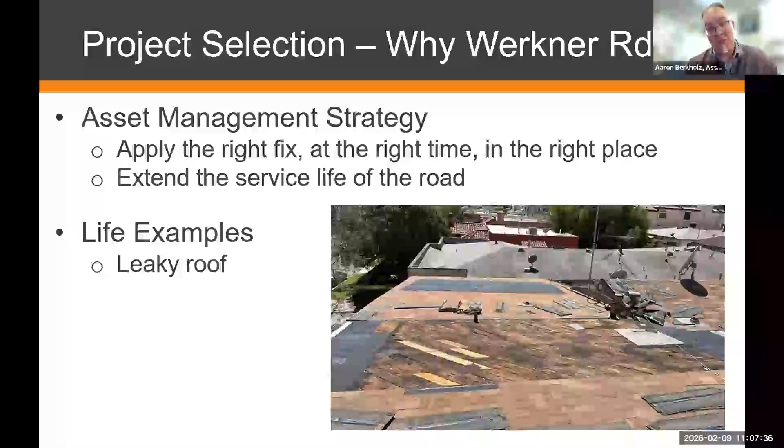Again, to state it simply, it costs more money to improve a deteriorated road than it does to continue to maintain an existing road that's in good or fair condition. Next slide, please.

And so, again, continuing to talk about asset management strategies that we employ here at the Road Commission, we look at the Pavement Surface Evaluation and Rating. That's called PASER. And so basically that is a visual surface rating that we apply to our paved county road system. So if a road is in good condition, that's a PASER rating of 8 to 10. And everything is based on a 1 to 10 scale. So 10 being the best, like a brand new road, and 1 being a completely deteriorated road. That would be in the poor category.

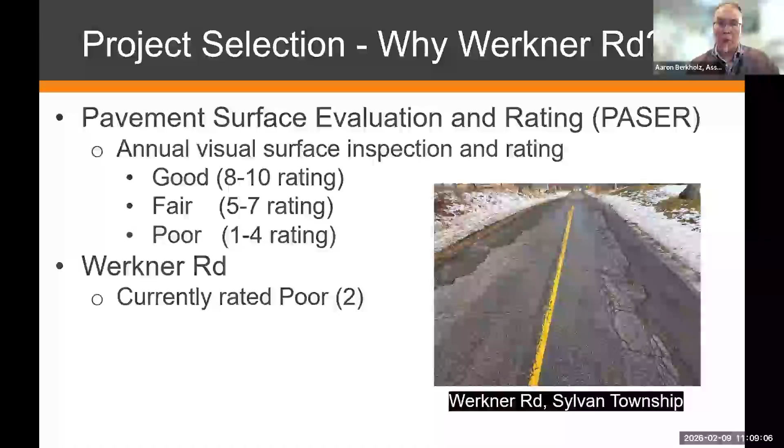So annually, we have those staff go out and evaluate every mile of our paved primary county road system. And then we go out every other year and we evaluate our local county road system, the paved portion. Next slide, please.

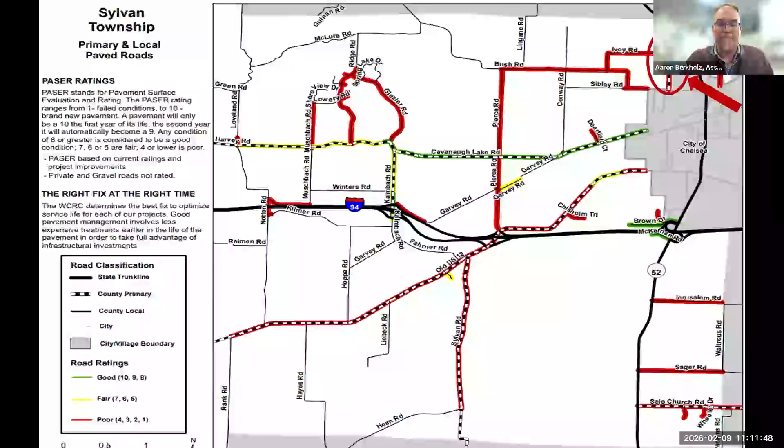So, again, going through how we selected Werkner Road, we get into a funding discussion. Werkner Road is funded in large part through the roads and non-motorized millage here in Washtenaw County. The current millage extends from calendar year 2025 through calendar year 2028. So again, that's a 4-year roads and non-motorized millage. That was passed with the support of the voters here in Washtenaw County, and we're very thankful for that.

Really, having that funding generated through the county road millage has allowed us to make significant headway as we've strived to improve primarily the county primary road network. It also is a non-motorized millage. So there is a portion of that millage that goes directly to Washtenaw County parks that is used for things such as the M52 trail or the border-to-border trail that extends along Huron River Drive. But again, that's right off the top of the funding that's generated by the millage. That goes to county parks.

And then the millage also provides funds to the Washtenaw County Road Commission, as well as the cities within Washtenaw County. They each get their fair share of that road millage. So for instance, City of Ann Arbor, City of Ypsilanti, and City of Chelsea do receive funds through the county road millage.

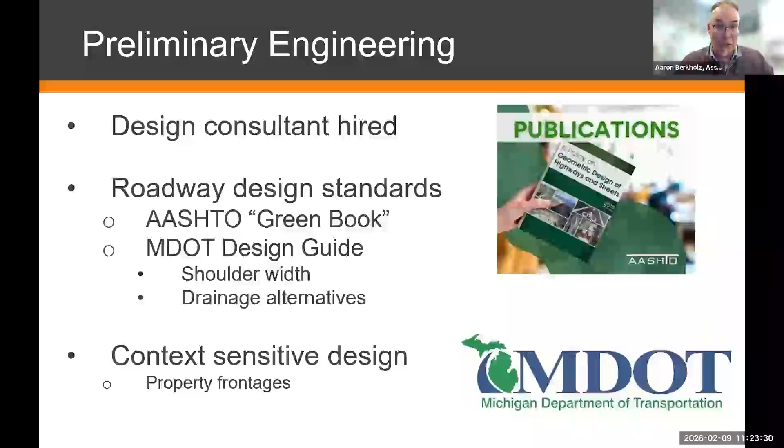Again, the homeowners, depending on the property, may actually own property to the center line of a county road. That does happen, where a property description will extend to the center of the road. But the Road Commission possesses that authority within that right-of-way to control the right-of-way and to thoughtfully improve it to promote the efficiency and the safety of the motoring and the non-motorized public. Next slide, please.

And a mill and resurface can be used for pavement that's in fair condition. So again, I talked about the PASER ratings, our asset management, and I talked about the leaky roof. In this case, this portion of Werkner Road, we just need to take the shingles off and put new shingles on. The road is in a fair condition where we can do a milling, a removal of the top 2 inches of asphalt, and then placement of 2 inches of new hot mix asphalt in its place.

The portion from the City of Chelsea water treatment plant drive going north up to M52, unfortunately, that is a leaky roof. That has gone too far. We cannot use a mill and resurface on that portion of the road. The road needs a more extensive improvement, and that's going to involve a pulverize and paving.

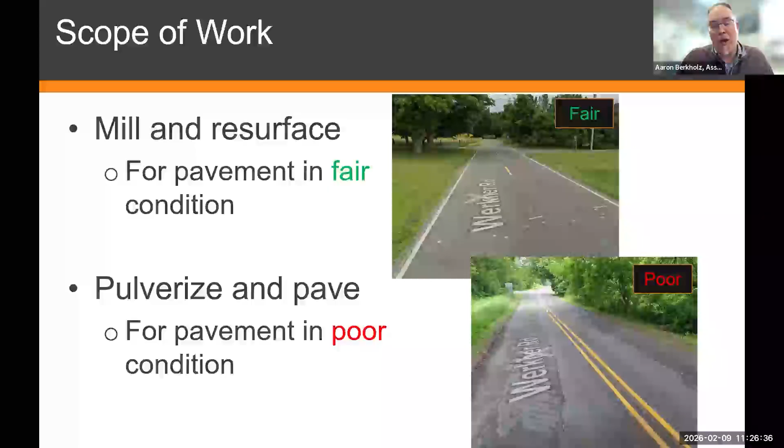So kind of repeating what I've talked about already in today's presentation, the portion that I'll refer to as Section 1, that's the southerly portion, extends from Sibley Road to 1,200 feet north. So again, that's approximately to the City of Chelsea Water Plant Drive. That is going to be milled and resurfaced. We would slightly widen the asphalt there.

And I'm going to stay away from widening the road because we're not going to widen the traveled lanes on the road. The existing lanes are approximately 11 feet on either side of the center line, and we would basically keep that. We're going to remark the lanes at 11 feet wide. We're going to add slightly to each outside edge with asphalt so that we can get a 6-inch white edge line along each side of this portion of the road.

In the past, we had previously used 4-inch white edge lines and 4-inch yellow center lines. But in the past few years, we have been transitioning into 6-inch wide lines for the edge line and for the yellow center line. And really, that provides improved safety for the motorist, particularly on a dark and stormy night. The motorist can more accurately see the edge of the road, see the center of the road, and also with current vehicles, with vehicles that rely on those markings for things like lane assist or lane departure, it helps to have that wider edge line and wider center line.

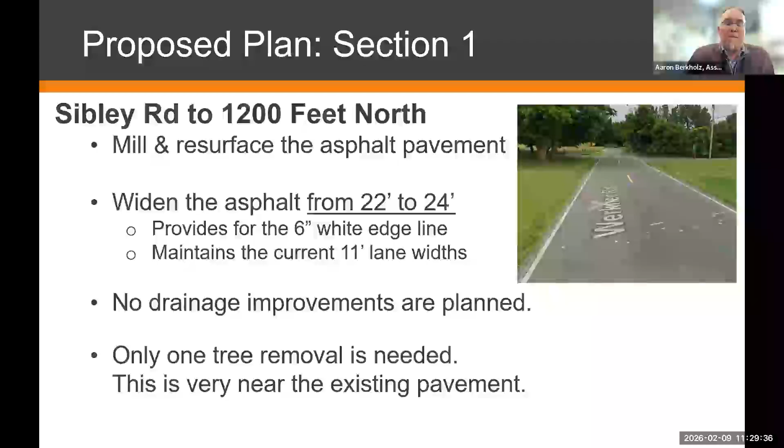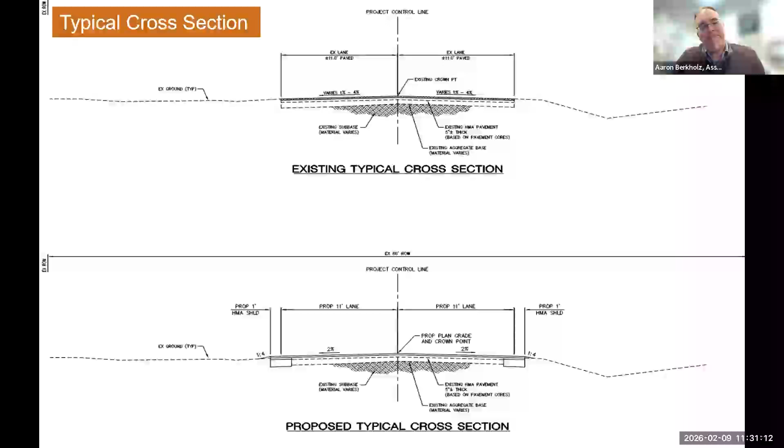So this is the proposed plan to the north. Again, I've talked about this previously in today's presentation. This is section 2. So this extends from approximately the City of Chelsea water plant, 3,700 feet north to M52. Again, this is the leaky roof portion of the road. We can't simply slap some shingles or do a mill and resurface on this section of road. It's too far gone. So what we would do here is we would pulverize, shape, and compact the existing road material.

Again, that involves bringing out a pulverizing machine that blends the existing asphalt material and the underlying aggregate, that stone base, and then that blended material is used as a base for the new asphalt surface that's going to be put on. Again, there's a mix of asphalt materials here. There's the old original asphalt, there's cold patch, there's asphalt wedging that's been done over the years. All that material is going to be blended together.

It's going to be shaped to provide a 2% crown. The 2% crown is the slope on the road. It extends from the center line to the outside edges to shed water to either side of the road. That rainfall, that storm water, it sheds it off of the road into the outside edges. It's really important to have that crown on that base material because then that translates into the 4 inches of new hot mix asphalt that's placed on top of that. Typically, a road will have a 2% crown, a 2% slope that extends from the center line to the outside edge of the road.

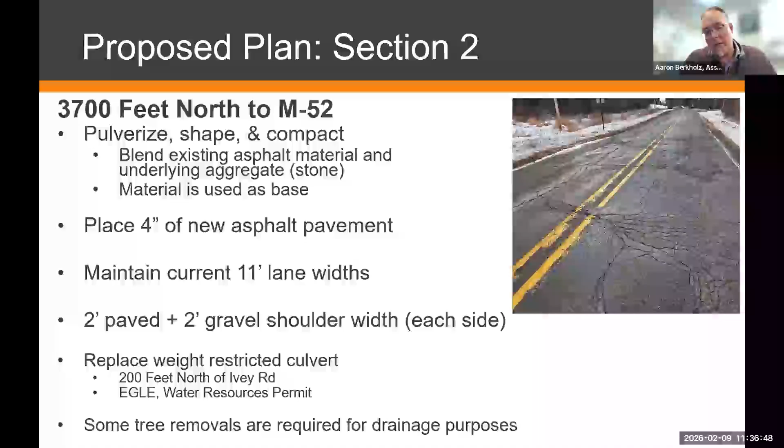You can't really use it on properties that fall away from the road, because you can imagine a curb and gutter, the back of a concrete curb and gutter is higher than the existing road. So if it's higher than the existing road, to have a property that falls away from the road, you actually would be impacting more of that frontage if you put a curb and gutter in.

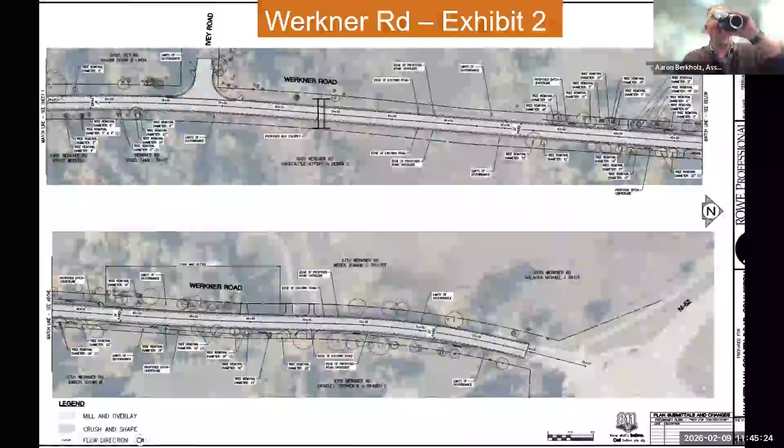So again, Exhibit 2, this is, I'll call it, the northern portion, that section 2 of the road improvement. Pretty much this shows the intersection at Werkner and Ivey extending north up to the roundabout at M52. So as you get into this portion, we do have tree removals called out on here. And you can see where we've got our plan call outs that indicate a tree to be removed, the size of tree that needs to be removed.

And again, the tree removals that have been called out here are necessary for us to make sure that we're dealing with the road runoff, with the drainage in an appropriate fashion. In all, we've proposed the removal of 48 trees for the entirety of this roughly 1 mile segment of road. Of that, there are no trees that are identified for removal that are larger than 30 inches. So basically, when the surveyors measure the trees, they measure it at chest height. And so we don't have any trees larger than 30 inches that we plan on removing.

We do have 2 30-inch diameter trees that we would propose for removal. We have 12 trees that are 21 inches to 29 inches in diameter. We have 10 trees that are 18 inches to 20 inches in diameter. We have 7 trees from 12 inches to 17 inches in diameter. And then we have 17 trees that are smaller than 12 inches in diameter.

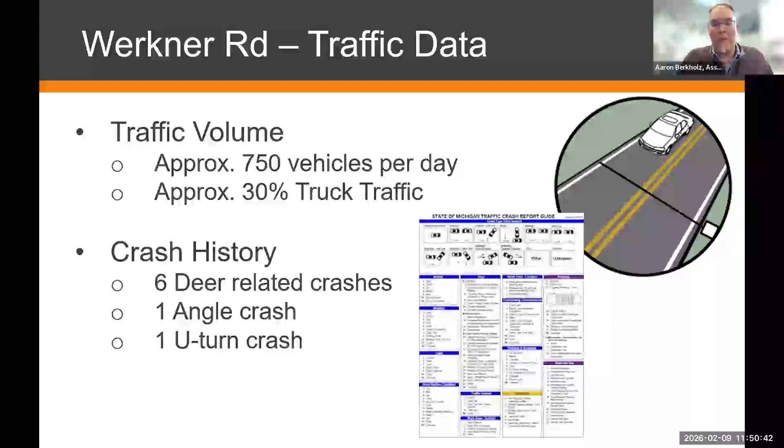The reason we look at life-altering crashes is often there are ways that we can incorporate improvements into the road to reduce the possibility of that type of crash occurring. And one thing we do have to look closely at when we're trying to make that type of improvement is having a clear zone along either side of the road. That is one of the factors that would improve the safety for the motoring public. Here, we look at the crashes that have occurred in the past, and we're thankful that that has not been the case here. Next slide, please.

Another topic that has been brought up, and certainly not unexpectedly, because it comes up quite a bit, is the speed limit. So again, Werkner Road is currently unposted at a prima facie speed of 55 miles per hour or whatever is prudent. Looking at the Michigan Vehicle Code, prima facie would mean on the face of it. And basically what that means is that for an unposted county road, the motorist can drive up to 55 miles per hour or whatever is prudent for road conditions. Again, you are not going to be very thoughtful as a motorist if you are driving 55 miles per hour on a snowy and icy day. But that really applies to any road, whether there's a speed limit posted or unposted.

It's up to the driver to employ, I'll say, some common sense, which isn't always so common, to actually operate their vehicle in a safe and prudent manner. Speed limits are data driven. So basically the way speed limits are established is they're measured in the field. Prevailing motorist speeds are used to set the speed limit on a road.

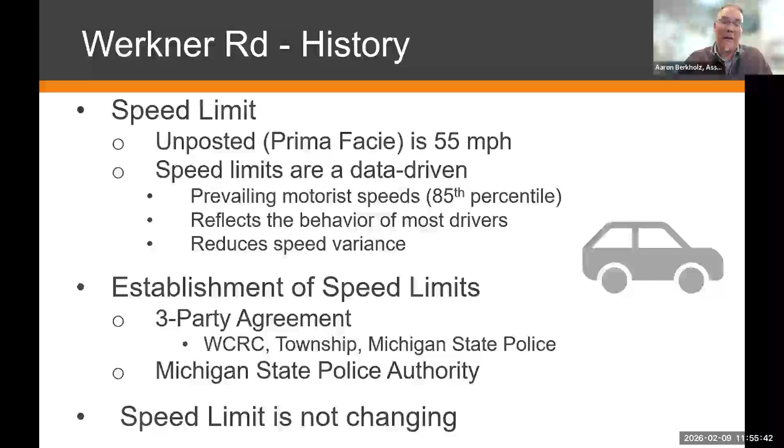So the next steps involved in this project, we will have a discussion with an individual property owner with any property that has a tree along the road that is slated for removal. So we would engage those individual property owners. We provide a tree removal notice. So basically that is identifying the trees that we feel need to be removed, and it is offering the trees to the adjacent property owner.

So the trees would be cut up into 8-foot lengths, and they would be placed outside of the county road right-of-way if that property owner would want that wood. But again, before any trees are cut, there is going to be a discussion with each property owner who has a tree identified along their frontage for removal.

We are not going to come in the middle of the night and cut down trees. We are not going to come out on a Sunday when we think no one is paying attention and start cutting trees. There is going to be a discussion with each property owner who has a tree in front of their property that is slated to be removed. And those tree removals have to be accomplished before April 1st. And the reason being is because of migratory species, because of consideration being given for migratory bats and migratory birds.

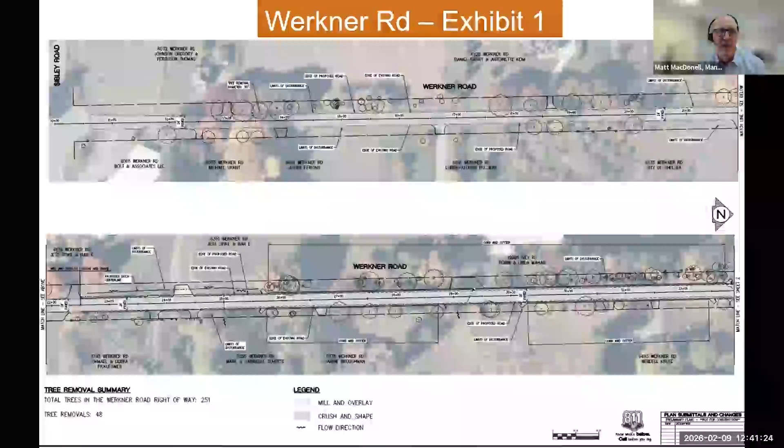Did you mark the trees that you're planning on cutting yet? We have not. No, that's what we're trying to do with the exhibit. You'll see the exhibit once you go on the project web page, and it's a PDF. You can zoom in. We've marked it with the size, and you can see a depiction of the tree on the aerial. So that gives you a real good indication of which ones are marked on the sheet for removal. We have not marked them in the field. We want to have that discussion with the property owner first. As Aaron indicated, we're going to be talking to all the property owners and specifically go over what are the impacts to their frontage.

Yeah, I think it would help everybody if you even put a ribbon, or like what you guys usually do is mark it with a blue dot. Yeah, we usually mark it with a paint dot. And Melissa, I'll offer, having been on site, there were several trees marked with a blue dot, and generally that blue dot was put on the back side of the tree. I don't know who marked those trees. Generally, when we mark a tree for removal, we're using pink paint. It's on the road side of the tree, I'll call it the front side of the tree.

And we did have some discussion here. I discussed it with the road commission team, the idea that should we just go out and mark the trees now so that people see it? But our concern is that people would feel that means it's a done deal. That if we marked them, the road commission isn't listening, and we're going to come out in the middle of the night or on a Sunday afternoon and cut down the trees. Again, we want to make sure we have the discussion with the property owner that's adjacent to the tree removal before we would mark the trees. So at least then they're not surprised by it.

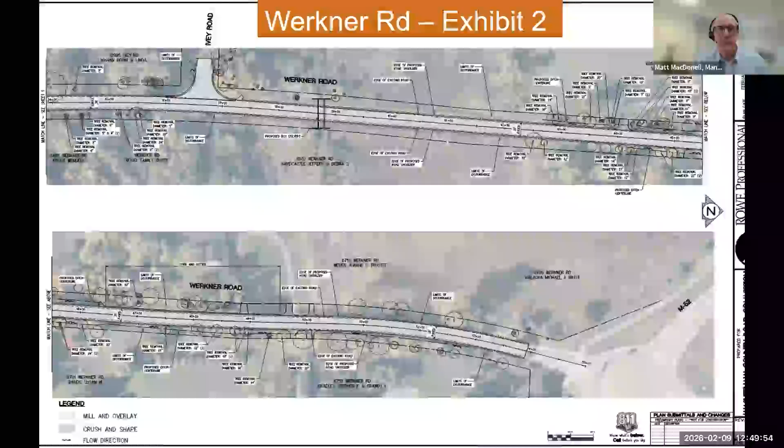Thank you. Lauren asked, was an environmental impact assessment completed before engineering design occurred? Given this scope of work, we do not need to complete an environmental impact study.

Okay. Jess, I'm going to ask you to unmute and then I'll get back to you, Justin. One second. Go ahead, Jess. Can you hear me? Hello, Jess, go right ahead. Sorry about that. We got multiple computers going in the office, so we're trying not to overlap on each other.

I don't know if this is a question for you, Aaron, or Matt. Do you guys have cross sections? My property, the 1,320 feet running from the Gaunts up to basically Ivey Road, I'm sitting in my office right now, my property is almost 9 feet higher than the road, adjacent to the road. I'm not sure if Tiffany can switch slides to your cross section. You're showing a 1-on-4 slope. I'm just wondering what your plan is. Do you guys have any cross sections of what's going to happen in those areas?

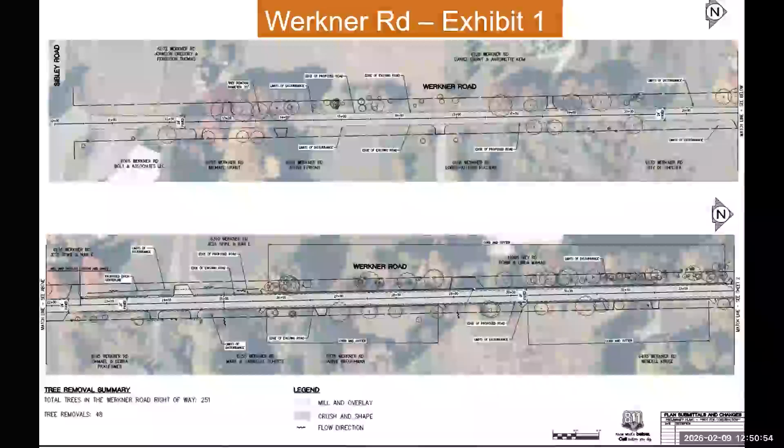So we have an aerial view with the curb and gutter for a lot of your frontage. The cross sections are kind of the typical. It would not necessarily apply to yours. A lot of yours would be the curb section. In fact, there are no tree removals along your property frontage. Zero. No, and I appreciate that, Matt.

Okay, so on Wednesday night we can get into those details. Unfortunately, we're going to be out of the country. We can't make that. Okay, we'll make an arrangement for a time to go through that.

So I guess what I'm asking, Matt, is ROWE doesn't have any specific details for those sections yet. Because as a builder, I just don't see how you're going to get away without a retaining wall there. I mean, it literally goes from the current lack of shoulder that's there up about 7 to 8 feet. Yeah, and Jess, again, we can get into detailed discussions with you when we come out to visit, but your section, as Matt said, is largely the curb and gutter section. And as I described, the advantage that your property frontage would have is you're higher than the road.

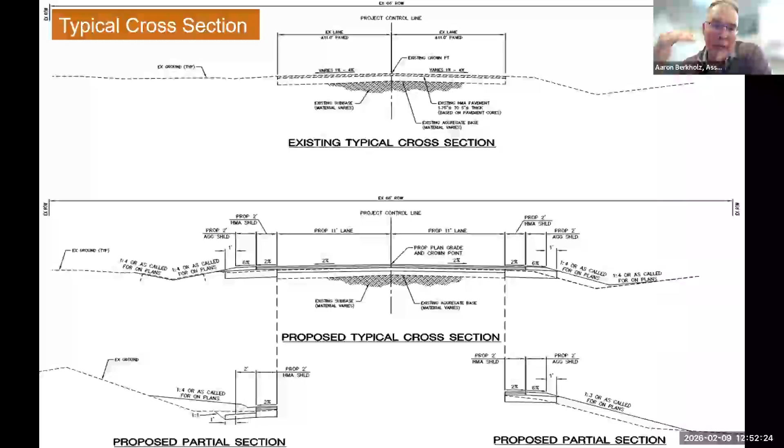Sure. That allows us to get that 2 foot wide curb and gutter section in. And then we could come up away from that with a steeper slope, like even a 1-on-2, which again is going to further limit the impacts. But the way that we currently have it laid out, none of the trees that were identified along your frontage would be coming out. Okay.

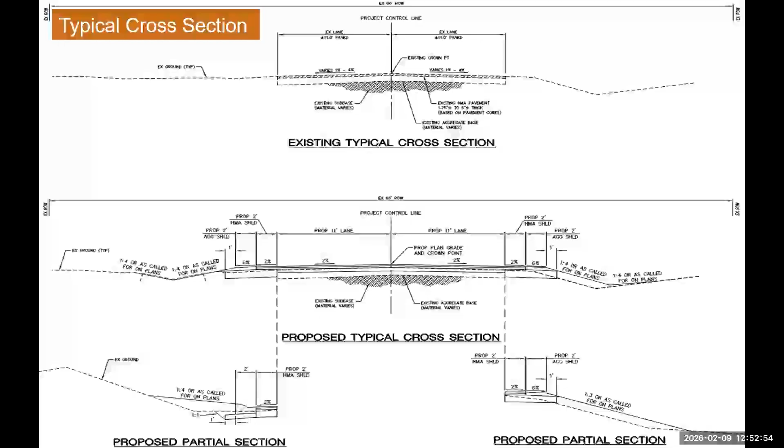Last question is your curb and gutter. Where's all that water going? Are you guys going to a stormwater system or is it going to be open discharge? Open discharge. It would go into a spillway. Okay. And those points of exit have yet to be identified, or is that part of ROWE's plan? No, we've identified the spillway locations, and then opening that spillway into an open ditch section, and then conveying that water into existing water courses.

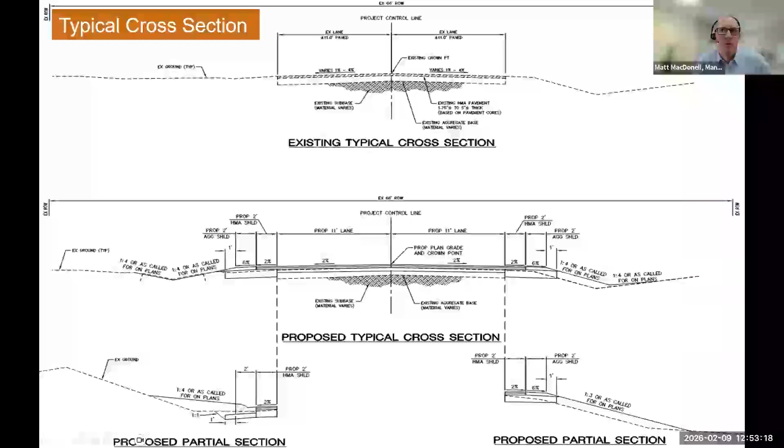Yeah, you'll see them on the exhibits, the spillways and the ditching, and then there's even flow indicators of direction of flow. So definitely check out the project website, and a PDF of the exhibits will be there. Okay, thanks, guys. You bet.

All right. Okay. And then I'll have you lower your hand. I have one gentleman. Okay, Justin, I think you were next. Go ahead, Justin. Justin, are you there? Justin Perkins? Hi, I'm here. Okay, go ahead.

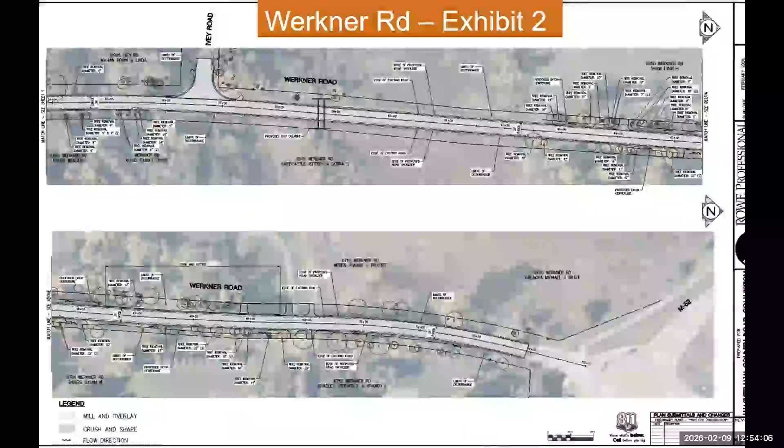Okay, so just really quickly, back to the safety topic. Were there any other safety improvements that are in scope of this project? We talked about stop signs being basically not within the authority of the Road Commission, but it does seem like there are a lot of other less expensive and less invasive safety improvements that could be made, like rumble strips, painting dedicated turn lanes, wildlife warning signs, dynamic feedback signs, other traffic calming measures. Are there any safety improvements in scope aside from the shoulder work?

So, Justin, I think we had talked previously with you about the dynamic feedback signs, the speed trailers or speed signs. We do find those are effective. They have to be used in a manner that makes them effective. Essentially, if you leave a digital speed display out too long, it becomes background noise to the motorist, where they just start to ignore it. But dynamic feedback signs can be effective.

Rumble strips, we do put them along our county primary roads in certain locations. There are centerline rumble strips and shoulder rumble strips. Generally, what leads us to put rumble strips along the center line or edge line is a history of lane departure crashes. Rumble strips also can lead to some negative feedback, because if drivers are prone to leaving their lane, it causes noise, and that noise can be a nuisance to adjacent property owners.

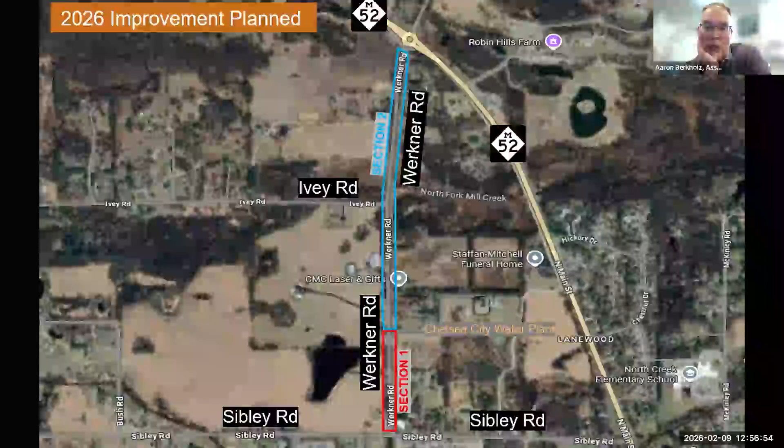road. Okay, great. And I think Jess asked a related question, but I'm not sure that it was totally answered. So I'll kind of circle back to it. What has been the consideration on safety, the net effect of safety from increased operating speeds? And I'm not talking about a posted speed limit. I'm talking about driver behavior as you widen shoulders and there's an increased amount of comfort driving. Has there been consideration for the increase in operating speed?

I think this is important because, as you mentioned, Aaron, the crash history on this road is very low. So it seems that we wouldn't really be looking at a crash reduction. We would be looking at, how do we make sure that we don't get more crashes? And how do we make sure that the crash severity doesn't go up? I think a concern that's shared by me and several residents is that widening shoulders increases operating speeds and is likely to increase crash severities. So has that been considered in a net safety analysis that has also included the impact of induced non-motorized traffic?

Yeah, Justin, the Federal Highway has several studies where it shows that widened shoulders actually reduce crashes and reduce severity of crashes. So that's the premise that we're working from. Okay, but is there a context-specific analysis for this project that considers those things? There has not been, other than us reviewing the crashes, and certainly in reviewing the crashes, 6 deer crashes is significant. And typically when drivers do see an animal, their reaction is to veer. Even though we'd say don't veer for deer, that does happen. And that's when you see leaving the road, and having that shoulder does make a lot of sense.

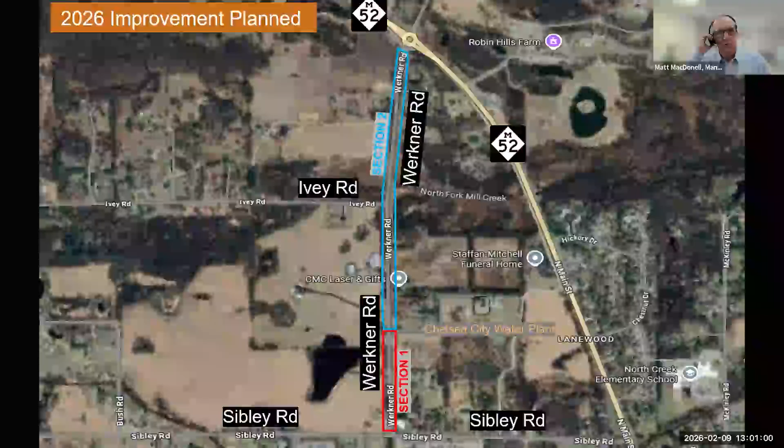Well, I'll just say thank you again for everyone that's attended. We look forward to our meeting on Wednesday night in the city of Chelsea. It's an in-person review that will be more of an open house format. For the first 30 minutes, we will take public comment, and then we'll go into the open house format. We'll have stations for folks to ask direct questions to staff on a little closer view of the project plan. Difficult to do online here, but we appreciate everyone's patience in working through this subject with us and the project information.